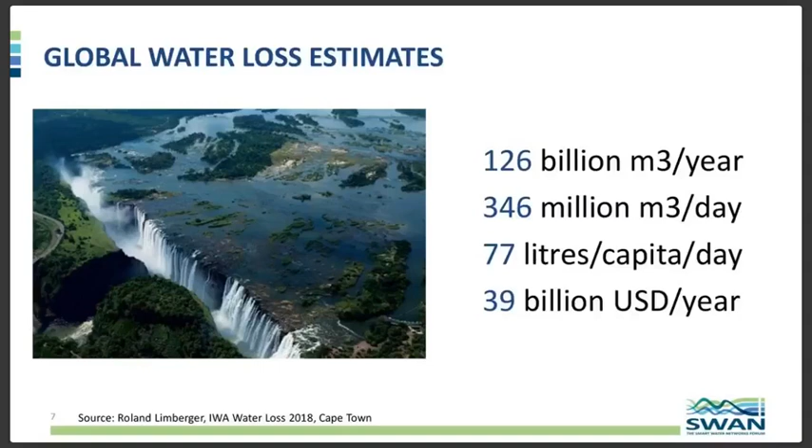This is particularly a problem in Asia Pacific, where many countries are in a water crisis. Growing populations, rapid urbanization, increasing water pollution, and competing demands for water have left water resources in many Asian countries in a critical state. The gap between supply and demand is widening, and there is increased competition between water users, such as farmers, households, businesses, etc.

Utilities in Asia also have every reason to worry about water loss. They can lose up to 65% of their production daily, with most utilities in the region averaging at least 30% losses. However, there are great examples across the region where water loss has been reduced to or below economic levels.

Singapore, which is where I am based, is renowned globally as one of the leaders with very low losses. Another great example is Phnom Penh Water Supply Authority in Cambodia, who reduced their non-revenue water from 72% in 1993 to just 6% in 2007. I think we'll all agree that's a remarkable feat, not just in Asia, but globally.

Now, the key to developing a successful strategy to manage non-revenue water is to understand the reasons for its existence and the factors that contribute to its rise. The techniques, solutions, and approaches can then be customized to address these specific needs. Today, we're going to hear from 3 specialists for water loss management on how they've leveraged smart water solutions to help bring down water loss in the regions they work.

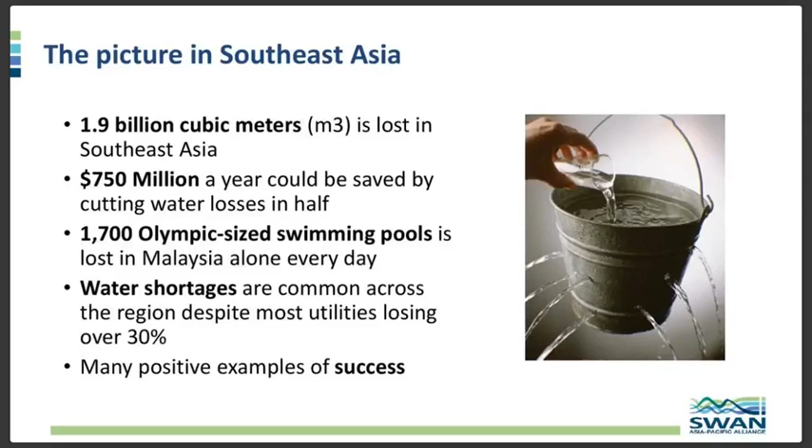I will be sharing with you our experience in managing NRW and the process in Maynilad's DMA automation. As we go along the presentation, I hope you could identify the technologies and equipment that can help a typical water company.

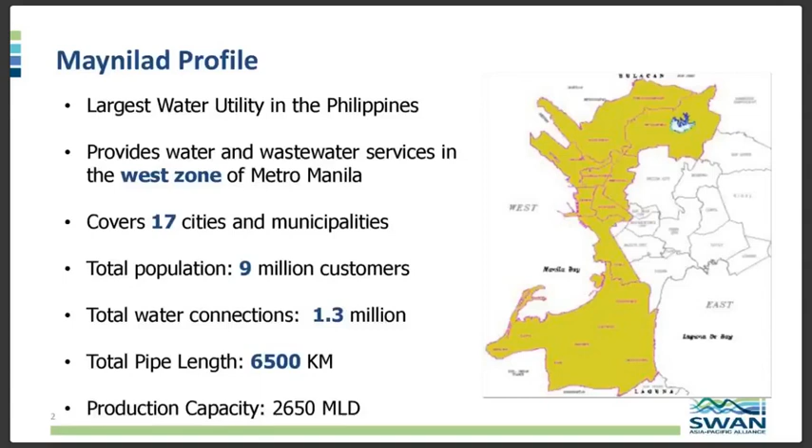Maynilad is the largest private water utility in the Philippines. It provides water and sewerage services in the west zone of Metro Manila, covering about 17 cities and municipalities. We serve about 9.3 million customers with 1.3 million connections, 6,500 kilometers of mains, and a production capacity of about 2,650 million liters per day.

The situation in the West Zone during 2007 was that we had a high NRW of 66%, about 1,500 MLD, with 75% of NRW being physical losses due to leaking and aging pipes. We also had poor service level, with only 50% of customers having good water supply, 81% service coverage, and 3 million people with no access to piped water. Because of this, in 2007 management decided to focus on the NRW Reduction program and come up with a strategy to reduce NRW.

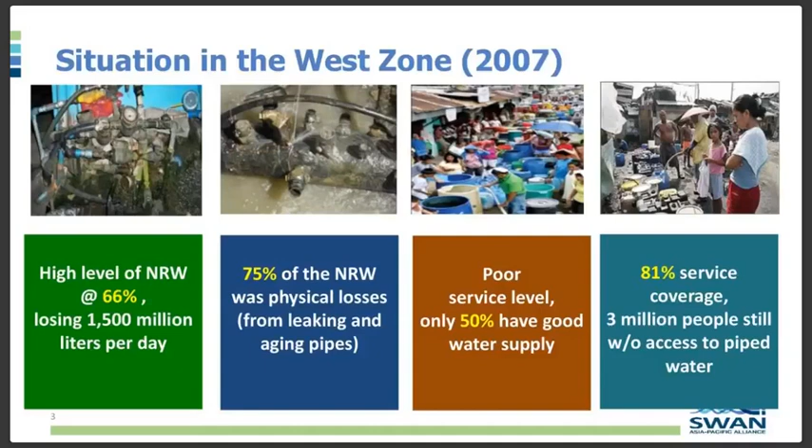The NRW strategy we use is to first break up the network into manageable areas, diagnose these areas, address their NRW, and manage NRW. We use the district metered area approach to efficiently manage our NRW.

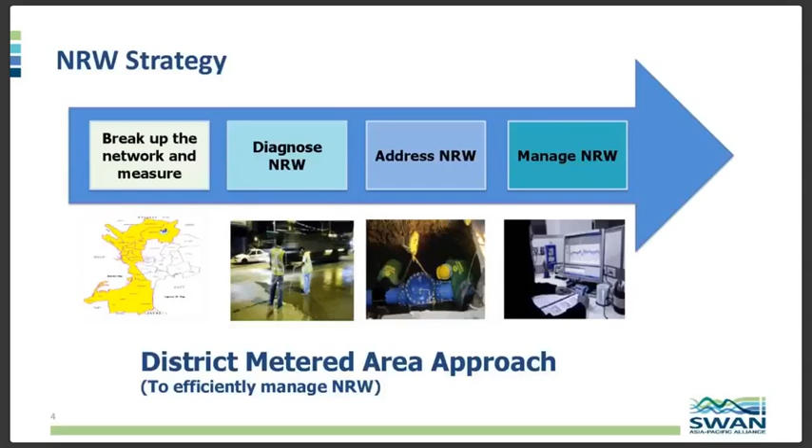With the district metered area approach, we created 1,600 DMAs, and it was a challenge for us to manage and monitor these DMAs manually.

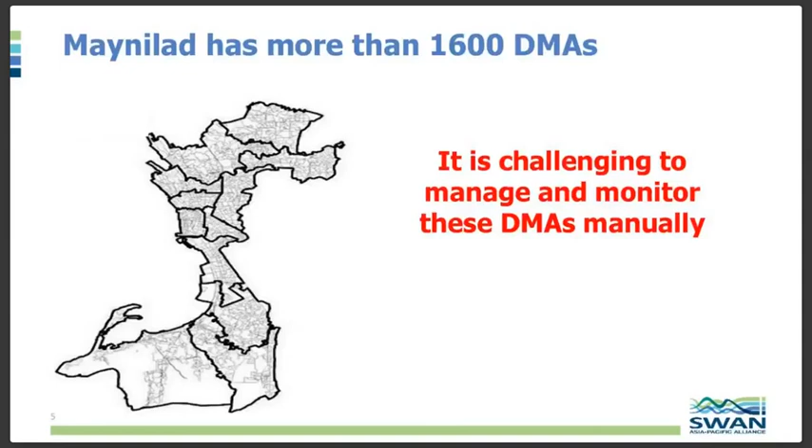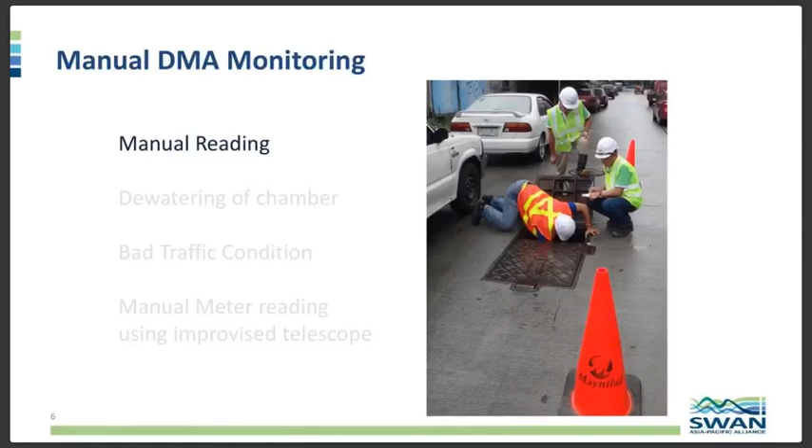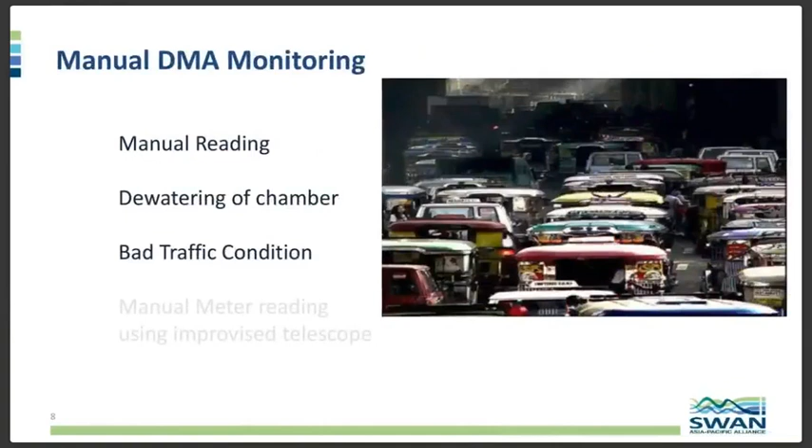The first thing we did in manually monitoring these DMAs was manual reading of the meters for each DMA. In cases where the vaults were flooded, we dewater the chambers. We also had bad traffic conditions that made reading the meters really hard. In some cases in Maynilad, we cannot dewater the chamber, so we use an improvised telescope to read the dials of each DMA meter.

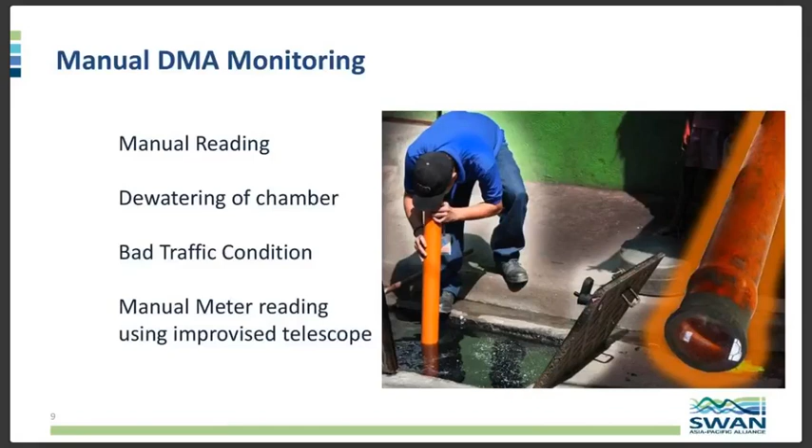The limitation in manually monitoring each DMA is that we have insufficient data for our analysis. Data are read once every month, which is insufficient, and because of this reaction time takes longer in cases of breakages in the network. Too much manpower is also used just to gather the data, sometimes endangering the safety and welfare of our teams.

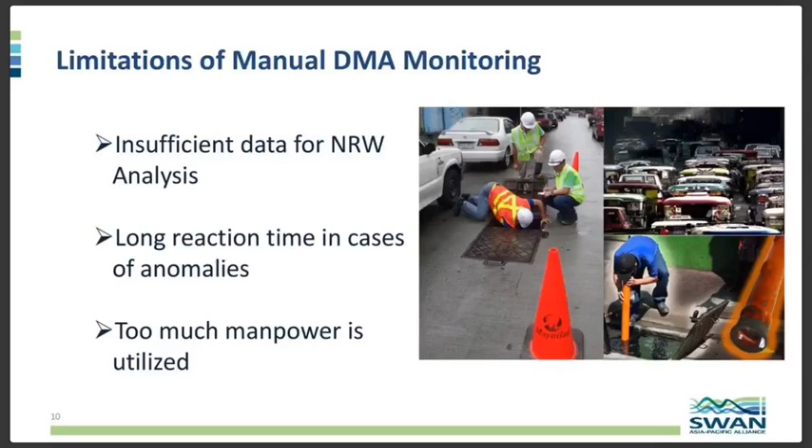We basically install data loggers on our meter entry points and critical points. The loggers then send data through our telco and transmit it to our data logger server. The data is then viewed by our area engineers for their analysis of any anomaly on the DMA. Now we can see the complete flow and pressure profile for each DMA for our analysis.

We also have a 24-hour leak profile and do minimum night flow analysis. We can also now see more data and trends to analyze.

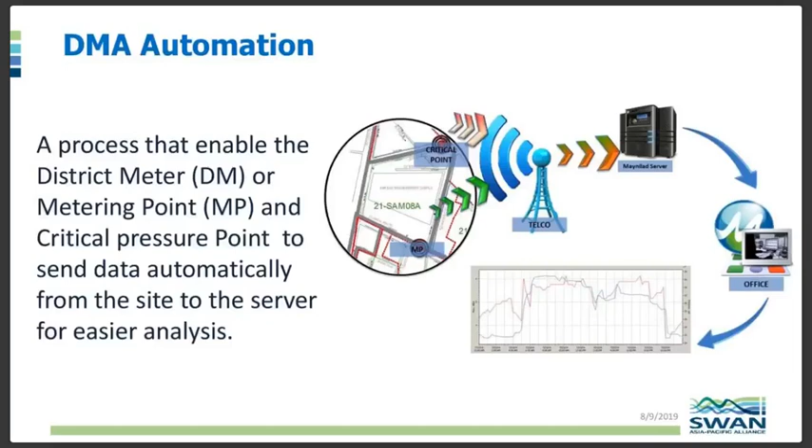The figure shows the early data logging setup of Maynilad. We have a typical data logger installed in the meter and connections to the pipe or pressure points. You can also see the antenna on the vault itself.

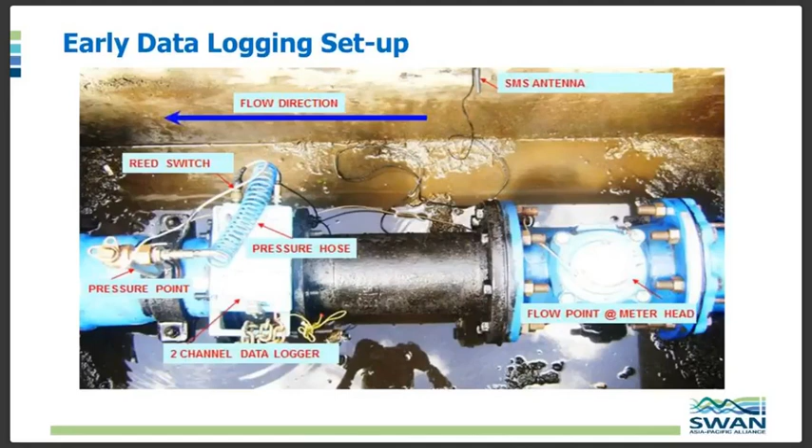Another part of DMA automation is changing our old process in data collection from other corporate data. The previous setup used Excel spreadsheets to consolidate all corporate data, and the result helped us in the NRW program and activities in each DMA. But since it was mostly manual monitoring, it was limited and reactive, making it inefficient.

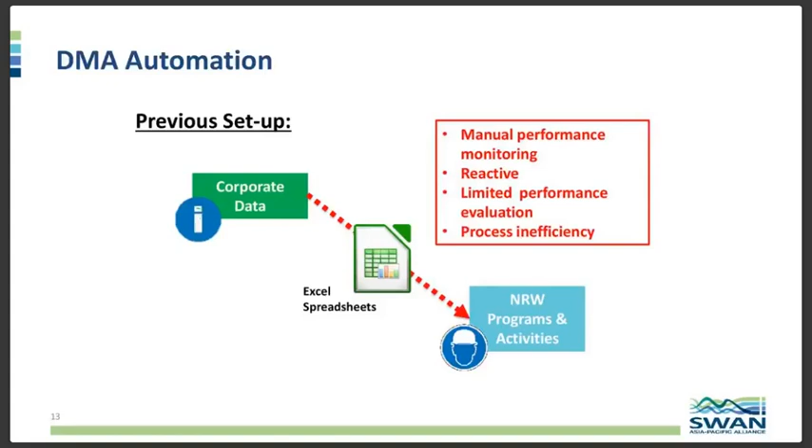What we did was set up a system that automatically collects the data from our corporate data and calculates all the needed reports to efficiently select the NRW programs and activities to be planned.

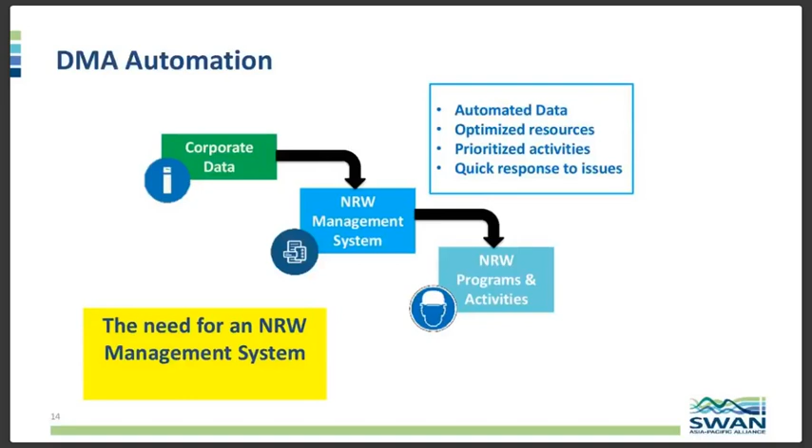Currently, these are all the corporate data in Maynilad. We have our telemetry data, where all the monitored flows, pressures, and tank levels are stored. Second is the customer data, where all the billing, customer consumption, and customer details are located. We also have our GIS data, with spatial data concerning infrastructure and non-infrastructure assets. Lastly, we have our customer complaints and jobs, where all the maintenance and leak repairs are recorded.

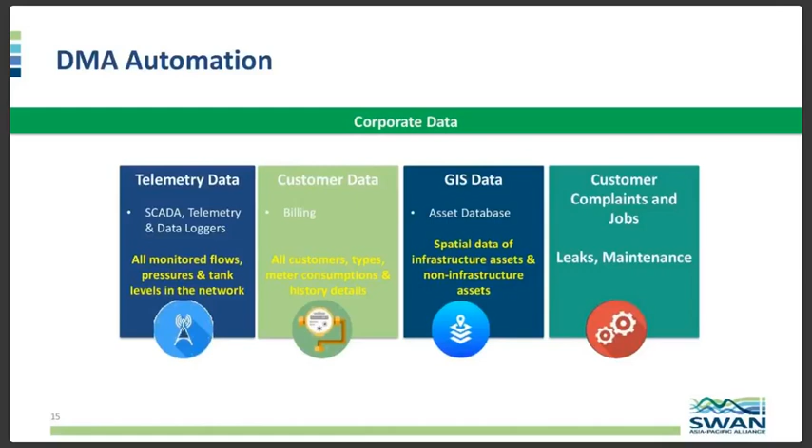So these four corporate data have their own database and management system, and we want the NRW management system to help us relate this data with each other. This NRW management system will help us in the decision making on what NRW program and activities to be implemented. It's just a one-stop shop that will show you all you want for NRW reduction.

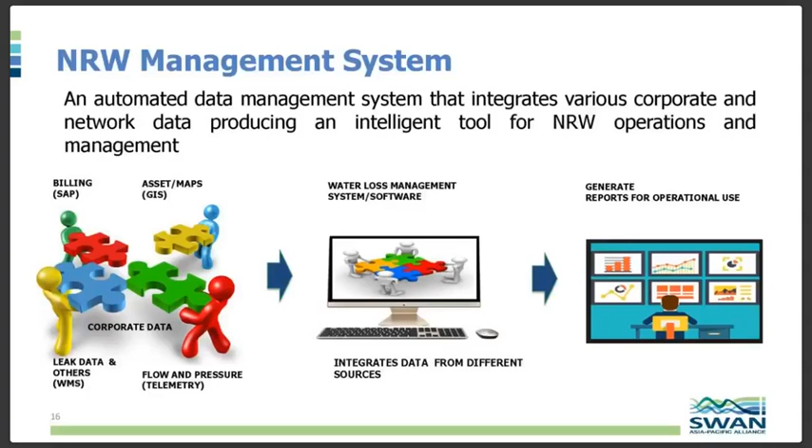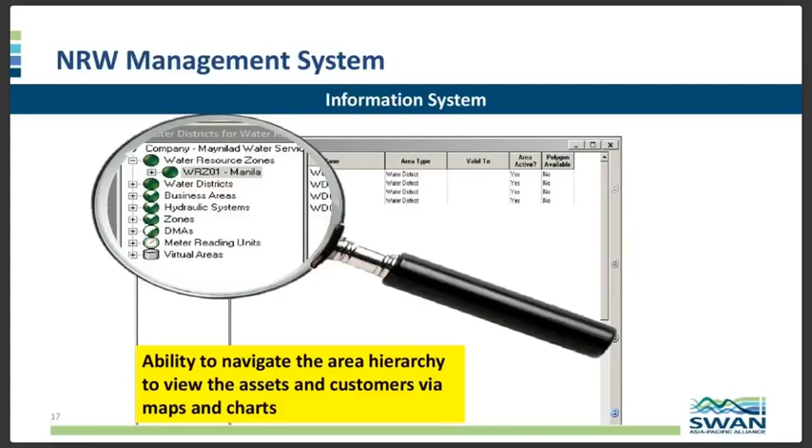In the next slide, I will show you the example of our NRW management system. First, we have the information system. This slide shows you the hierarchy of all of the areas in Maynilad, from the largest area to the smallest one. So for this example, you could see that we have the business area down to the lowest part, which is the meter reading units.

Another part of the NRW management system is the map. It shows you the map of the boundaries, pipelines, PRVs, meters, valves, hydrants, and our customers.

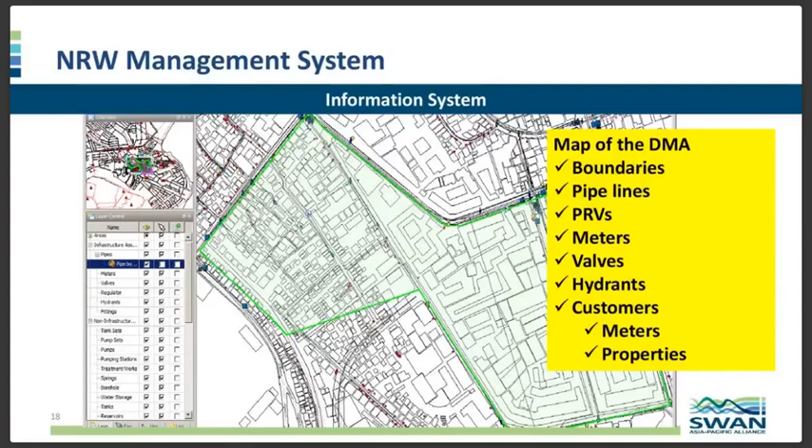Another example of our NRW management software application is that you could see the customer, which is the red one, and you could see the customer information. So all of the details for the meters, serial meters, and the date installed, you can see it here.

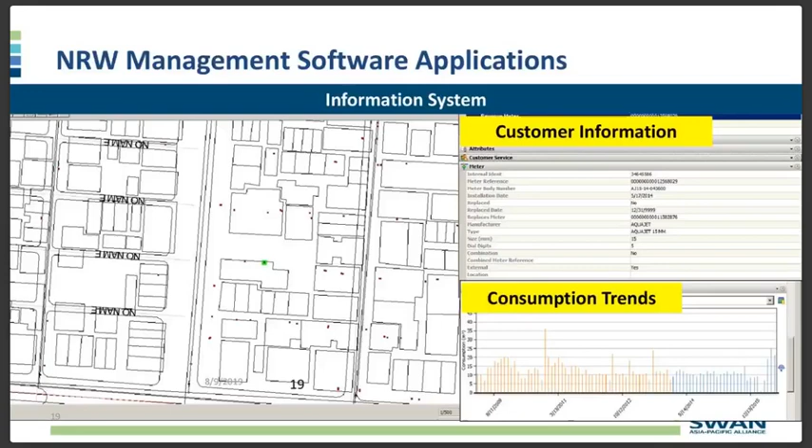Next, you could see the consumption trends. This is the monthly consumption trends of the particular customer. We use this normally to check if there are anomalies on the customer. For example, we have particular customers which have illegal activities.

The system also has a logger and telemetry information system, or we call it LATIS. It shows the flow pattern from each of the inlet meter and the pressure port on the monitoring, so you can now analyze the flow at the meter entry point together with the pressure from the meter and critical point.

For us NRW engineers, the most important is the night line, or the minimum night flow, which typically shows you what is the physical loss on the DMA. In addition, you can also see the effect of pressure management if you have a dual set PRV, as in this example on the slide.

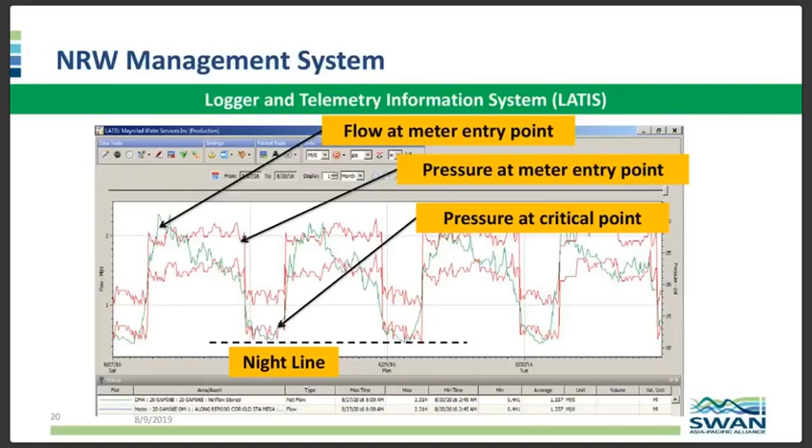This is a breakage that is seen in LATIS. It shows you the drastic increase of supply for the area, which indicates a mainline burst due to the abrupt increase in flow. You can also identify the start of the breakage and the repair.

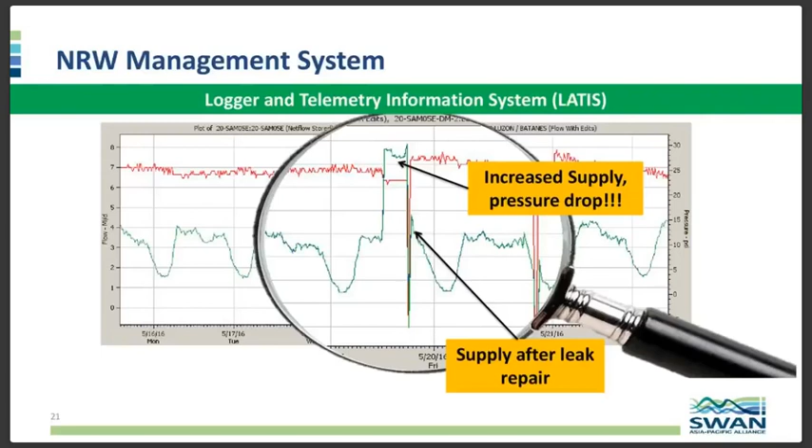It will also show you the time when we did energize the system, and shows you the trend after the repair to validate if the supply and pressure return to normal.

The NRW management system also has its own water balance. It breaks down the NRW into real loss and apparent loss. Real losses are the leakages, and apparent losses are illegal connections or measurement errors or billing errors. The result of the water balance prompts the NRW engineer whether to look for leaks or to investigate illegal activities.

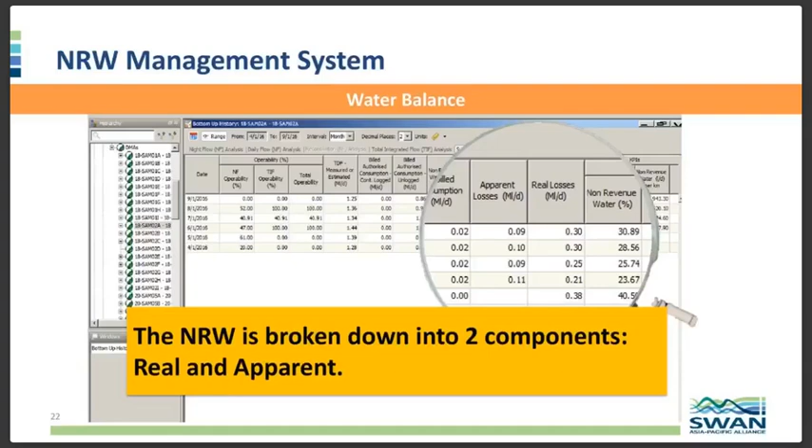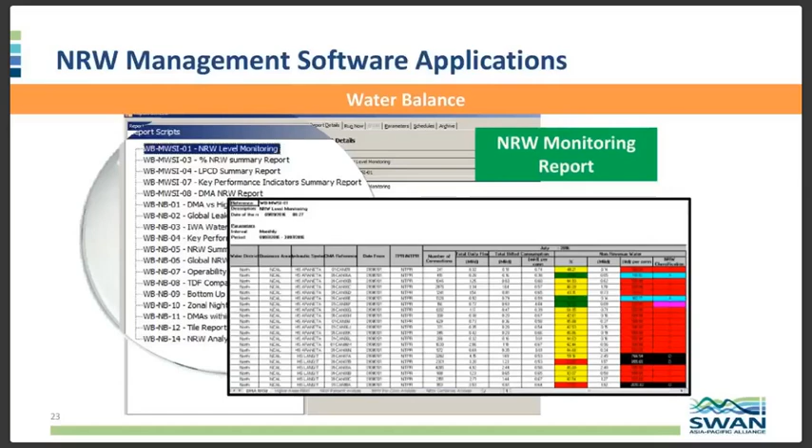This is another example of the NRW management system where it shows you a typical NRW monitoring report. Monthly, it can generate DMA NRW. This slide shows you the KPI summary for the DMA, and here you can see a chart for each of the DMAs.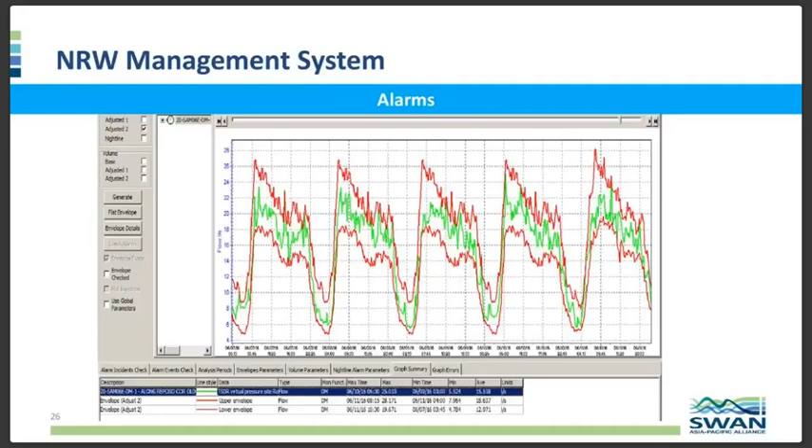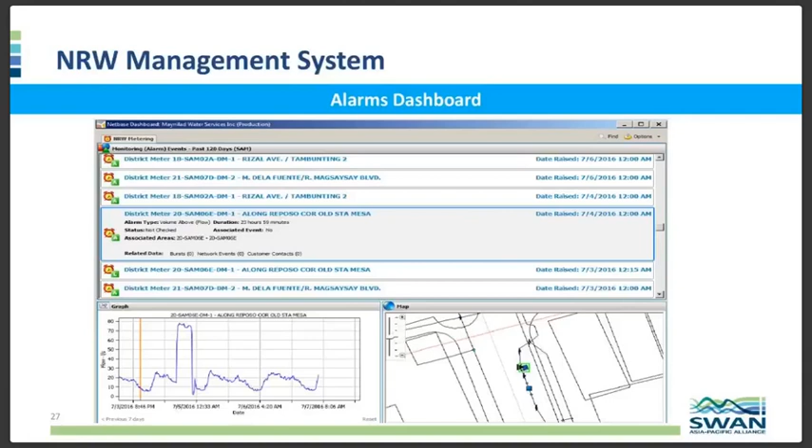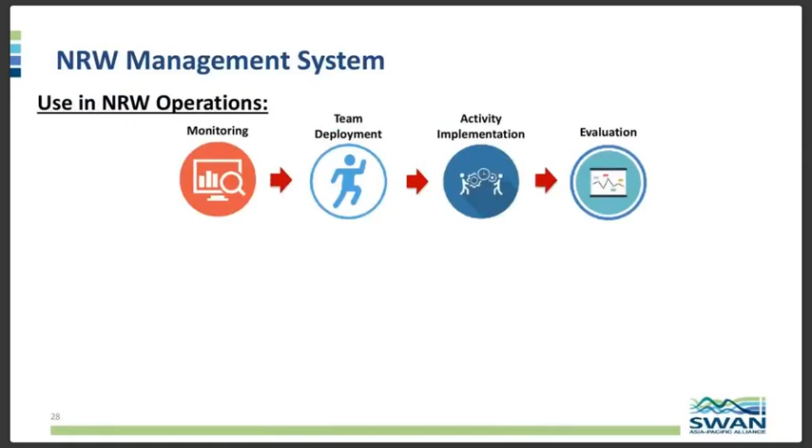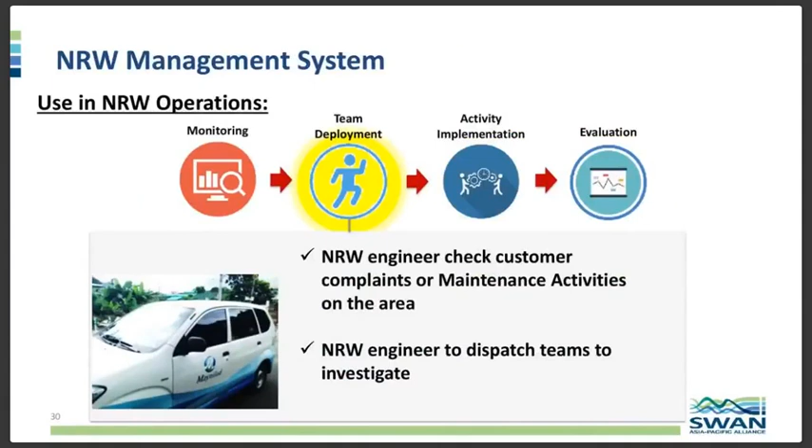So with the NRW management system in place, the basic process in our day-to-day operations is, first, our NRW engineer opens the system, and the system shows the DMAs with alarms. Second, the NRW engineer checks customers' complaints or maintenance activities in the area. If none, the NRW engineer will dispatch the team to investigate. Next, we do the leak detection and repair of the leak. Lastly, we evaluate if all of the flow and pressure returns to normal.

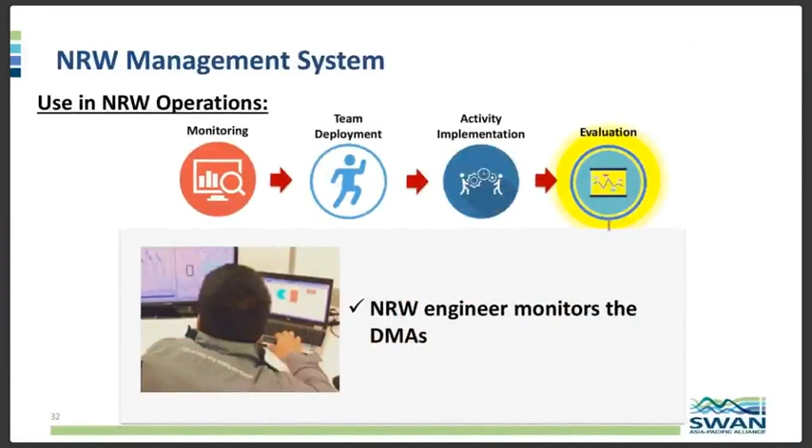In conclusion, DMA automation is an effective tool in managing NRW. It also provides real-time data and is available when needed. It alerts the engineer immediately when a problem in the network arises. All the data resources are used and sometimes show us other ways to improve other systems. And lastly, it provides information to better manage and prioritize NRW programs.

That is how Maynilad manages NRW. And from our experience, it is clear that NRW management is really a data-hungry activity. Since we are working in a dynamic system that changes constantly, from our sustained DMAs and diagnostic DMAs, we need an automated means to gather, process, and analyze the data. And with the help of advancing technology and new solutions, we could help other water utilities in reducing NRW. That's all, thank you.

Thank you, Mark Miko. I'm Khairul Effendi Tusam from Ranhill Water Services. Today I'm going to talk about the data-driven NRW Management System, a case study that we have done in the state of Johor in Malaysia.

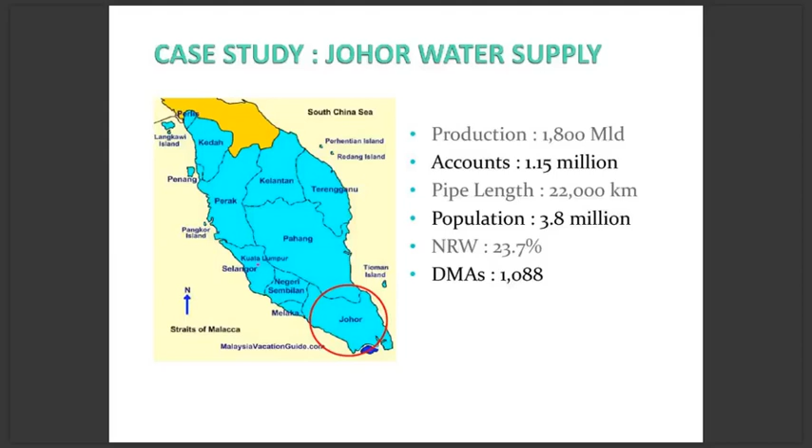Ranhill SAJ has started to implement a holistic NRW reduction program since the year 2000. Over the years, numerous sensors and monitoring devices have been installed to capture as much data as possible from the water supply system. These thousands of loggers and sensors from different components of the system, i.e. production, storage tanks, distribution, customers, etc., transmit millions of data to the office every month, making it too overwhelming to manage. This is worsened by the different brands of equipment used, meaning many different softwares and interfaces to deal with.

All these issues result in lengthy analysis duration, human errors in analytics because we depend on manpower to do the analysis, and delay in result translation causing slow response. The various types of equipment on the field result in many different softwares, and the process is laborious and staff intensive in terms of data analytics. This leads to slow NRW level reduction due to delayed corrective actions, limited accessibility to NRW data information for quick response, and hindered effective strategies going forward.

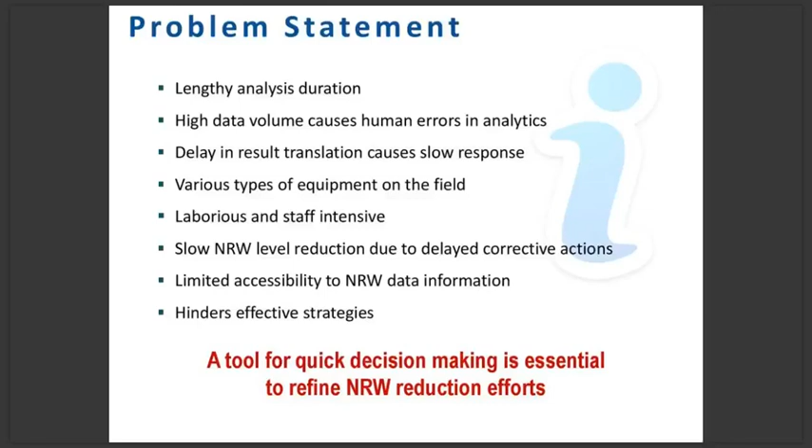Therefore, going forward, a tool for quick decision making is essential to refine NRW reduction efforts. For ease of monitoring, all field-related data is compiled into one system. This allows a one-stop system where data from all different loggers and sensors are integrated into a single platform. Being web-based, the system can be accessed from anywhere in the world as long as you have the password and internet connection. This gives top management access to the current status without having to rely on potentially bogus info from their personnel.

Some of the terms I'm going to describe further: for example, the job management system. NRW job management system actually deals with the repair works. As soon as we find leaks, we report it to the contractors, and the contractors get them repaired. All the processes are monitored and managed through this job management system, and it goes paperless, everything done online.

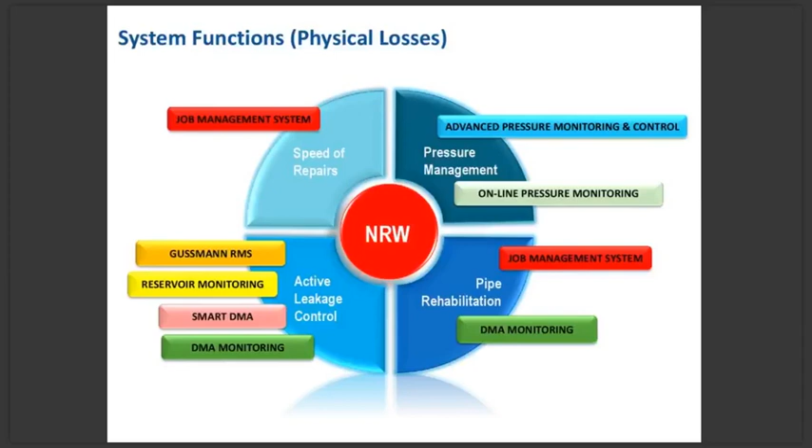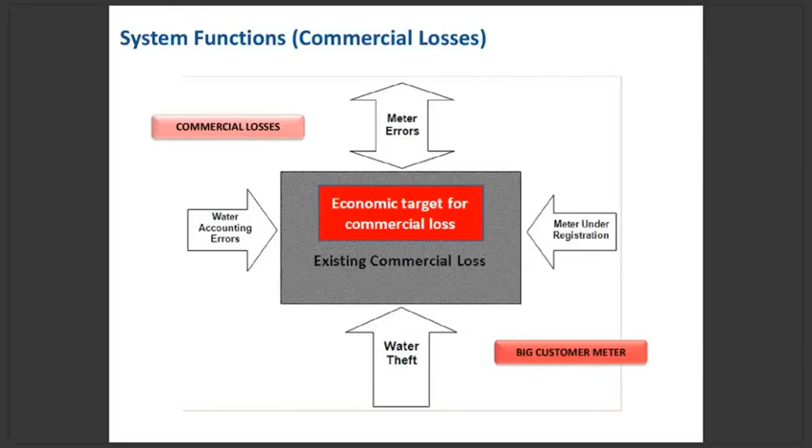Our active leakage control teams are also provided with mobile tablets, so they can check the status of the DMAs and act accordingly every day. We have about 70 teams here to manage the whole state of Johor, and every team will have their own baby DMAs to take care of. Each team handles between 15 to 20 DMAs.

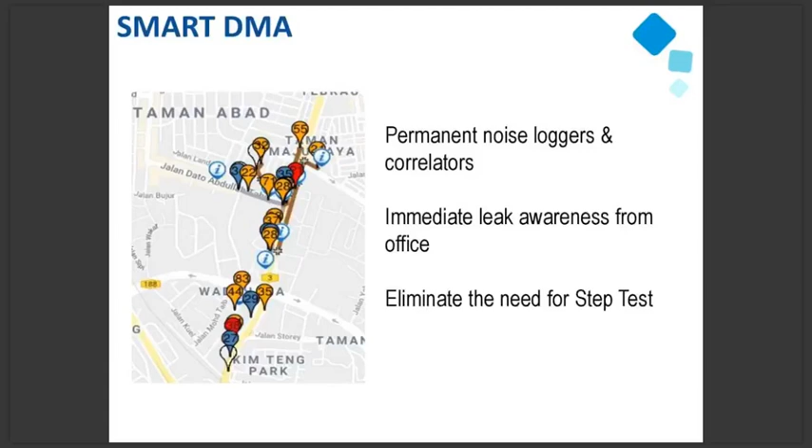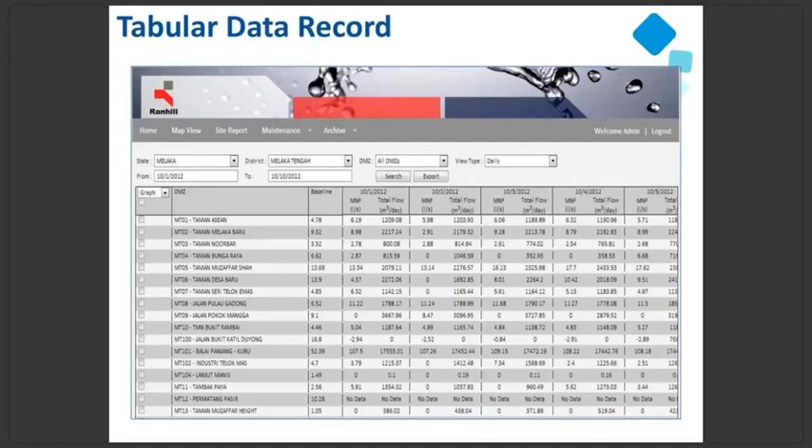This is a tabular record that we can see in the DMA module. From here, we can zoom in to any DMAs we want to see, and we can see the trend or track record of these DMAs since the date of its inception. So if the DMA was established in 2010, we have all the data since 2010. This enables easy analytics and trending for every DMA.

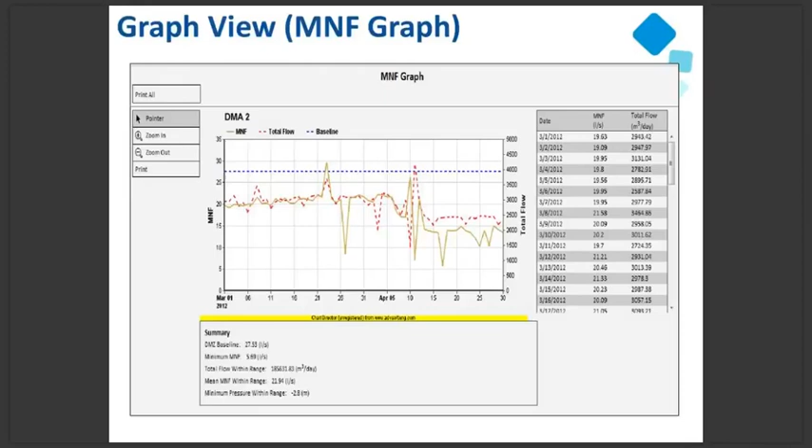It can be viewed in the form of a graph as well. We have two types of graph, the MNF graph and the normal graph. The MNF graph shows us the minimum night flow, the total flow, and also the baseline for every DMA. The baseline is what we set when we first established the DMA, so we can see how much reduction we have done since then. The baseline is equally important to measure our performance.

Once they receive the job sheet from the system, they just open it up, and using the coordinate that comes with the picture, they can straight away identify the location quickly and get it done. Once it is done, the job will be verified by our site supervisor and approved in the system for payment purposes. So everything is done in the system online, which eliminates the need for any paperwork that can actually delay the process.

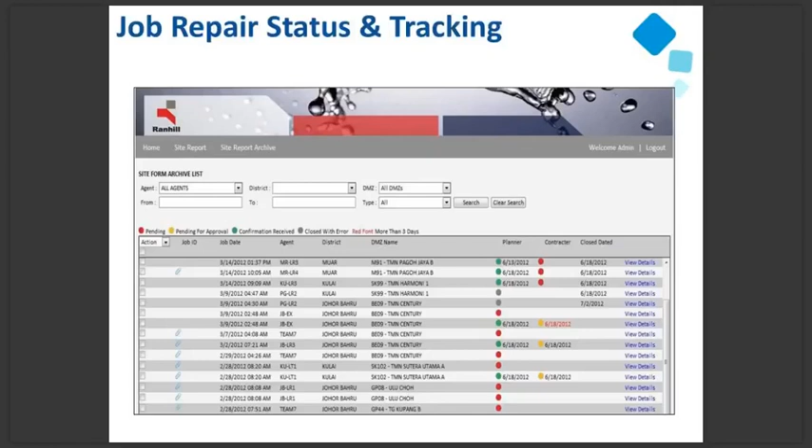The charter we have for all leak repairs is within 36 hours. So all jobs reported in the system must be completed within 36 hours, and it has to go green again within 36 hours. Otherwise, the subcontractors will be penalized.

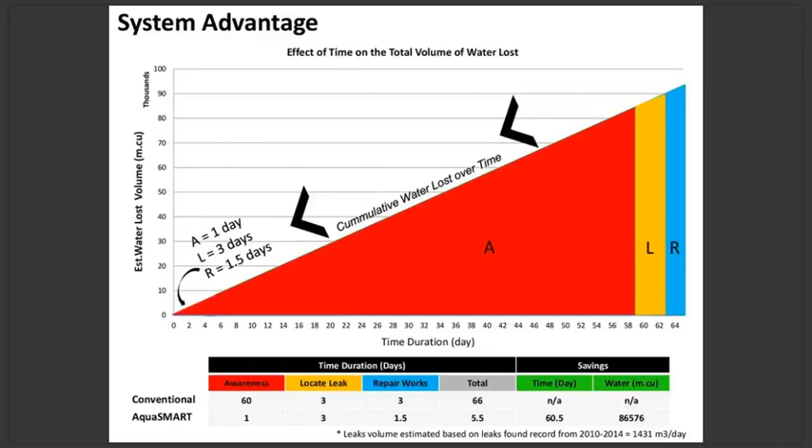The advantage of the systems, one important thing for us to fine-tune or refine the NRW reduction, is by reducing the ALR - awareness, location, and repair. It is very important for us to reduce the awareness time, the time we take to locate the leak, and the time we take to get the leaks repaired. By having this system, we have managed to reduce the time taken for all these complete processes from an average of 66 days to only 5.5 days. This has further greatly assisted in the refinement of NRW reduction in the state.

That was where we realized that whatever activities we did at that time were not enough to overcome the NRR, the natural rate of rise, so we had to introduce more teams to manage the DMAs. Then in the year 2010, we realized a lot of data started to come in, and we couldn't continue analyzing the data manually using all the manpower we got. So we started to introduce this data management system, and since then it has assisted to further fine-tune the NRW reduction in Johor until where we are now at 23.7%.

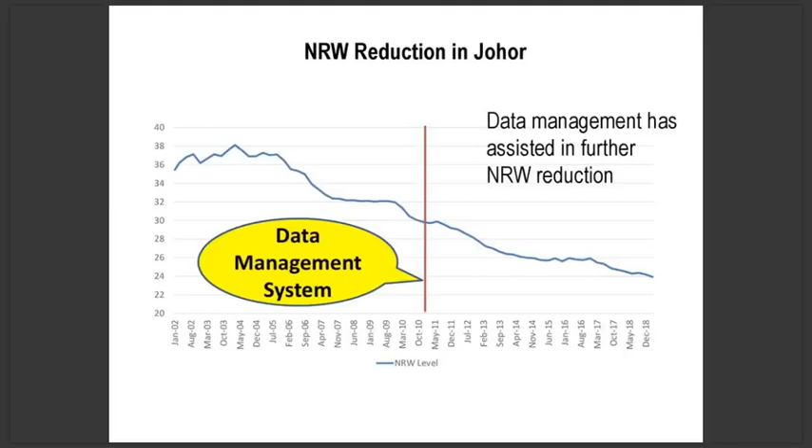The conclusion we can derive from this case study is that as NRW level gets lower, all processes have to be refined in order to squeeze further reduction, because there will be no more low-hanging fruits at this point. The best way forward is to carry out a big-scale pipe replacement program if we have the resources to invest. Otherwise, we have to adopt this alternative way of NRW reduction through refinement of all the processes, using the Awareness, Location and Repair concept (ALR). All three components have to be done in the quickest manner to minimize losses. After having all the infrastructure in place, data collected from various sources have to be analyzed and interpreted in a single platform to enable quick corrective actions and planning. In this case, data speaks to utility operators, so we don't work in the dark.

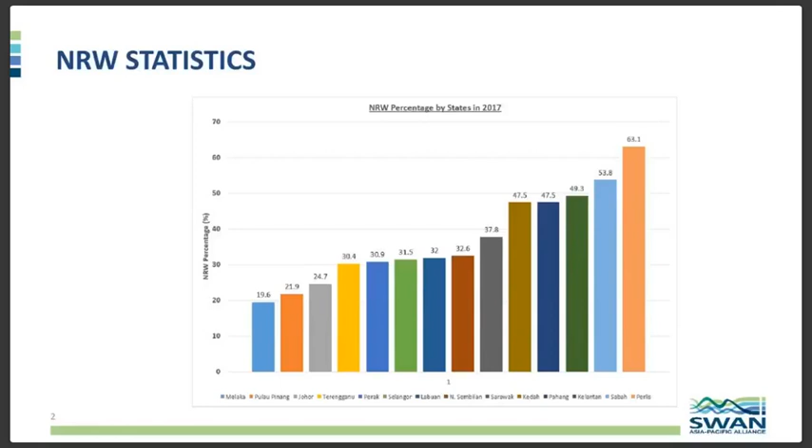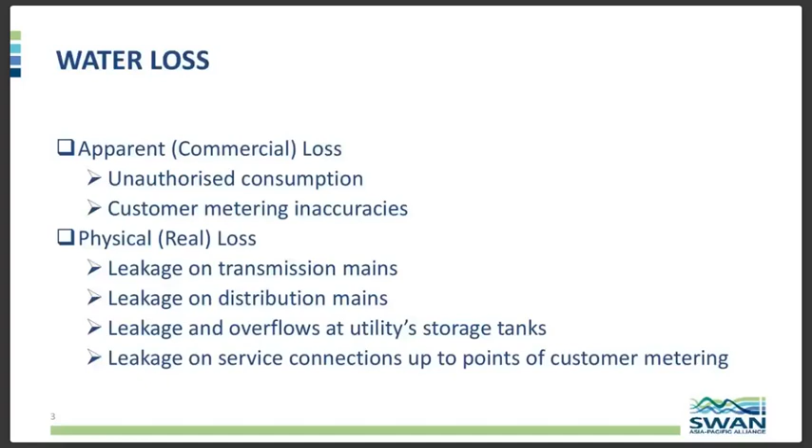So our topic today, we are talking more on water loss. Water loss can be divided into two: the first one is apparent loss, and the second one is physical loss. I will talk more on physical loss. The main topic I will present in the case studies today is about leakage on transmission mains pipes and leakage on service connections up to the point of customer metering, and also on advanced pressure management.

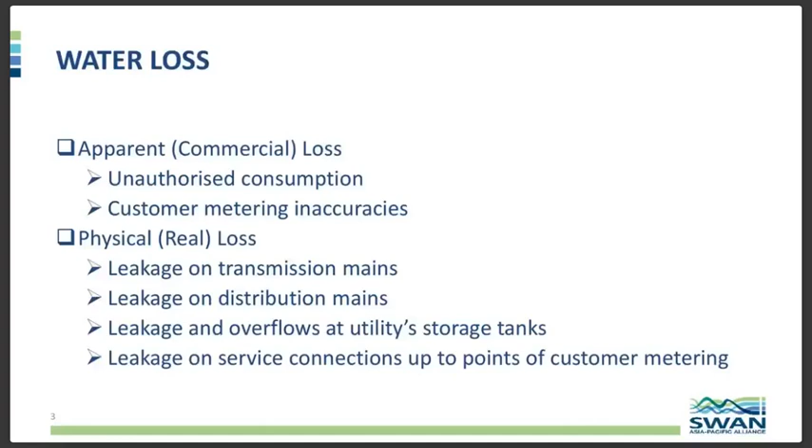For leakage on transmission mains, the behavior of the transmission main - the pipe starts from the outlet of the water treatment plant to the reservoir - normally it's a very large diameter of pipes. For example, in Malaysia, it starts from 300 mm and goes up to 2,200 mm in size, and the depth of the pipes under the ground can be more than 2 meters, some places up to 3 meters. Also, pipe alignments are unknown, which makes it difficult for leakage inspectors, even for visual inspection, to locate the leaks.

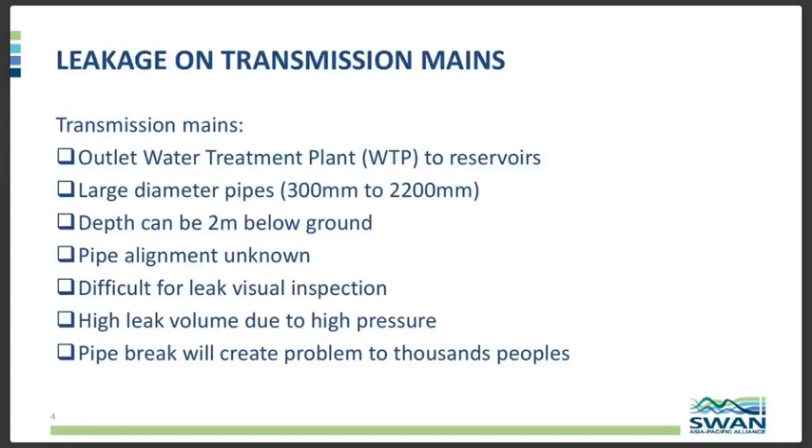Due to the high pressure in the pipes, any pipe leak will create a high volume of losses. If a pipe break event happens, it will affect thousands of people. Recently, it happened about 2 months after the Eid celebration period in Malaysia. It affected more than 800,000 customers, and we do not want this event to happen again.

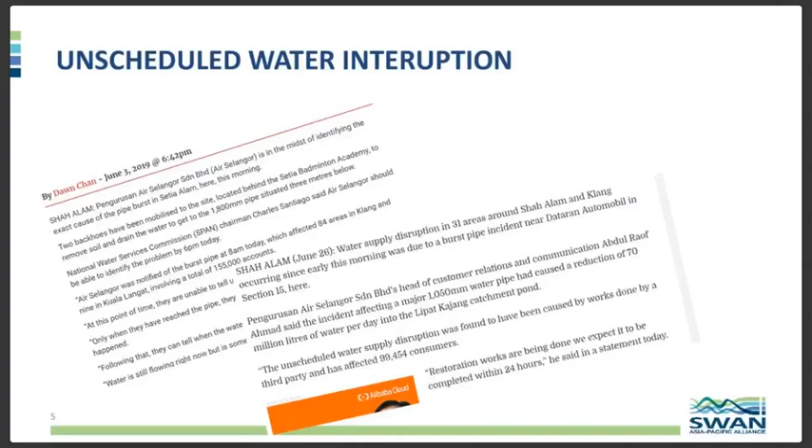For case study number 1, I will talk about pressure surge on trunk main pipes. One of the main causes of leaks on large diameter pipes is pipe surge, and it normally happens with immediate closing at the inlet to the reservoir. This behavior cannot be traced by normal 15-minute data logging; we need to use high frequency data logging in order to detect this event.

For example, with 850 mm pipes, data on the normal data logger shows only 66 meters, but actually when using high frequency data logging, it can be up to 109 meters - almost double what can be traced by the normal data loggers.

The surge happened when there was immediate closing at the reservoir inlet, then the pressure oscillated from 11 to 109 meters. This event happened within milliseconds - the change from 11 to 109 meters and back to 11 meters can create a pipe burst somewhere at the weak point in the system.

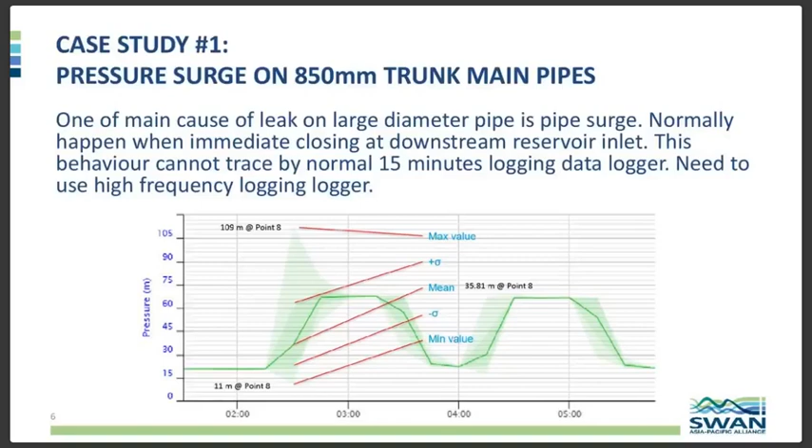Today I would like to talk about the technology we use to locate leaks on large diameter pipes, which is one of the technologies we call free swimming non-tethered technology. This technology is able to locate a very small size of leak, or pinhole size leak, up to 1 liter per minute, with accuracy of 1 to 2 meters, and the capability to do a long inspection with a single deployment, as we did in Borneo. It's also able to locate trapped gas, and is suitable for any type of pipe material.

The limitation of this technology: the minimum pipe size it's suitable for is 300 mm and above, with a minimum flow velocity of 0.3 meters per second.

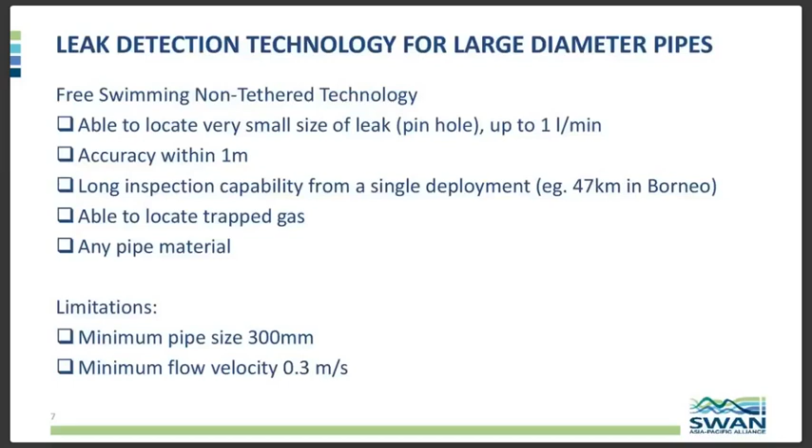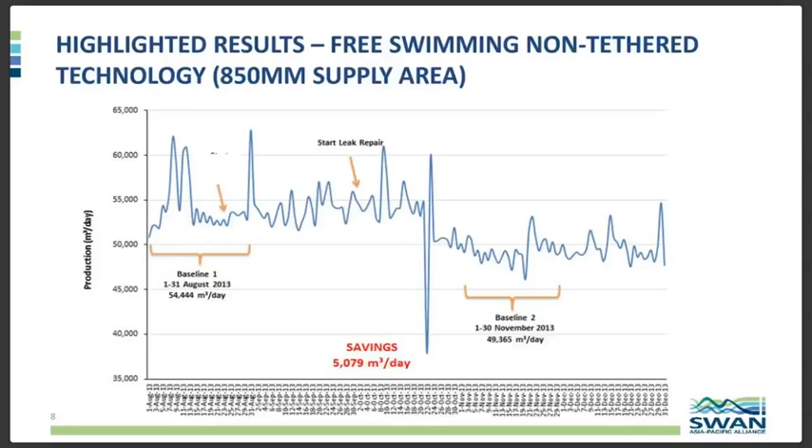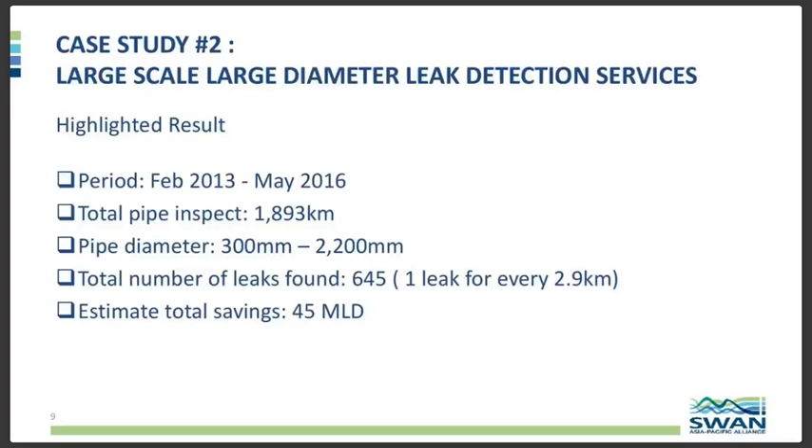The second case study follows the success of the first at 850 mm pipes. We moved to a large diameter leak detection service project. This inspection started in February 2013 and ran until May 2016, about 3 years, with a total of 1,893 kilometers of pipe inspected, ranging in diameter from 300 mm to 2,200 mm. We found 645 leaks, or 1 leak for every 2.9 kilometers, with an estimated total saving from the leak repairs of 45 mld.

Then we move to pressure management. We know the benefits of pressure management: it is the fastest and most economic solution compared to other methods. Pressure management can reduce burst frequency, save energy, improve customer service, extend asset lifetime, and reduce overall operational cost.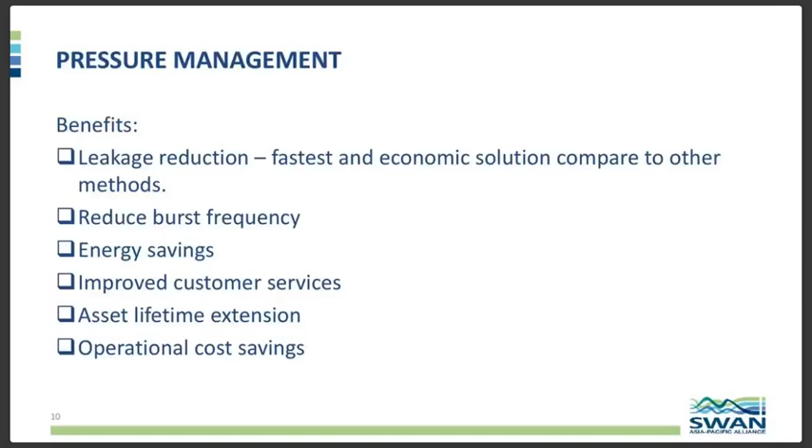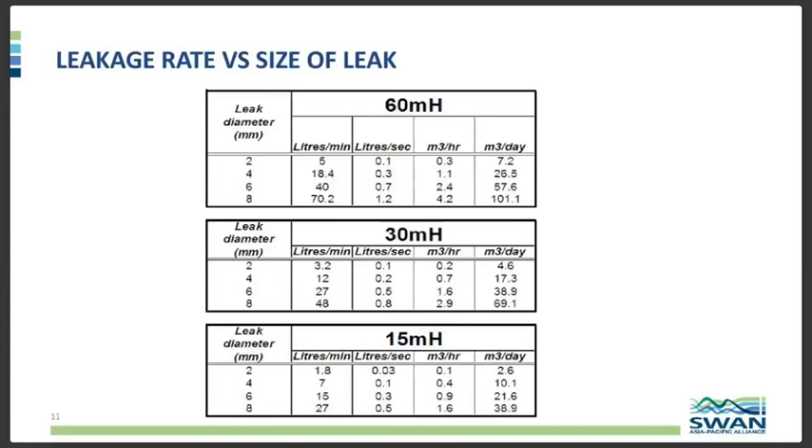Also, by reducing pressure at night, this gives more savings to the system.

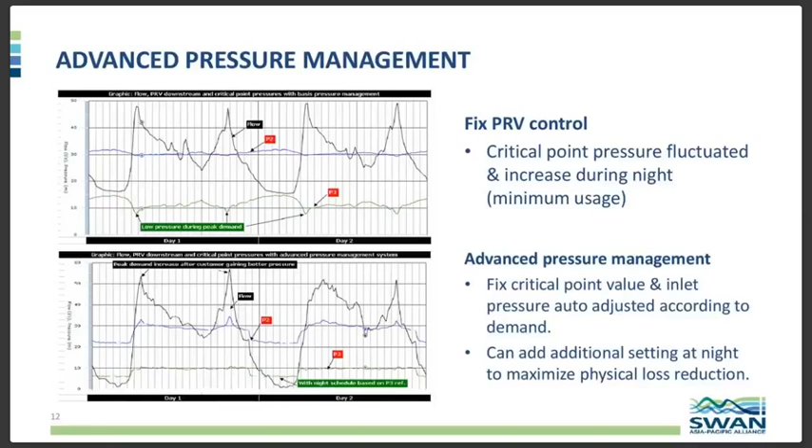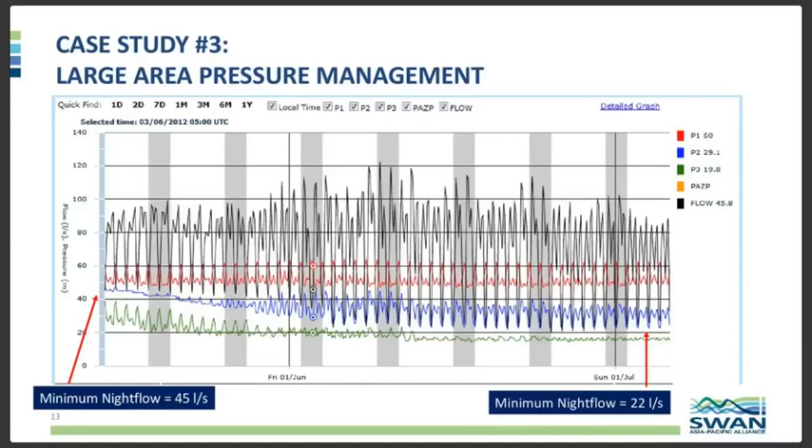You can see the green line started fluctuating from 20 to 40 meters. After about 1 month, the critical point becomes stable at around 20 meters, and the minimum night flow reduced from 45 to 22 liters per second. This gives a very good result in reducing physical losses.

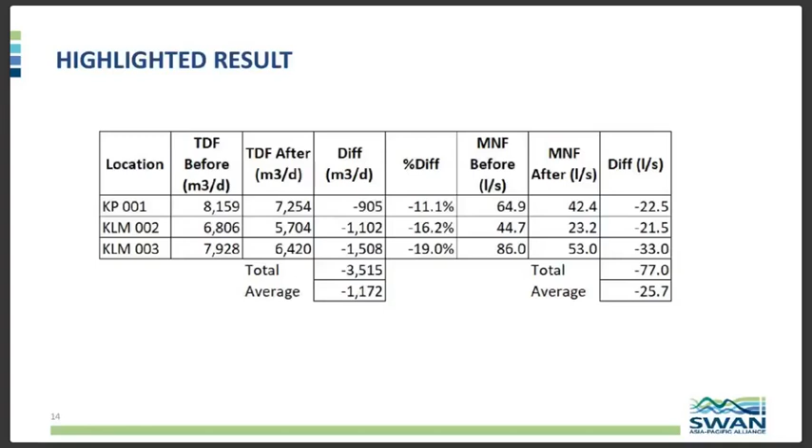This shows 3 areas where we installed advanced pressure management on a large system. In the table, the first one, KP001, started from 8 mld and reduced to 7.2 mld. KLM002 started from 6.8 mld and reduced to 5.7 mld, and KLM003 started from 7.9 mld and reduced to 6.4 mld. Overall, across these 3 installations, we managed to save 3.5 mld, or an average of 1.1 mld per installation.

In conclusion, from my three case studies today: first, trunk main leak detection gives good results on physical loss reduction but still receives less focus from water operators. Second, pressure surge is one of the major contributors to pipe leaks and bursts. Third, large-scale pressure management projects proven to give good impact on physical loss reduction. Fourth, water operators must give priority to pressure management and advanced pressure management programs, because they give significant impact to physical loss reduction.